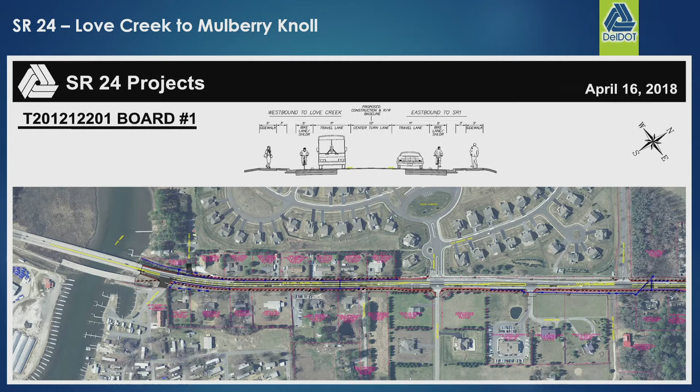I think I have these out of order, but I'll go from the far side. All 5 of these projects stemmed from the HSIP project years ago, and we're finally getting them closer to construction. This one shown here is the Phase 2 Love Creek to Mulberry Knoll. You can see the creek there.

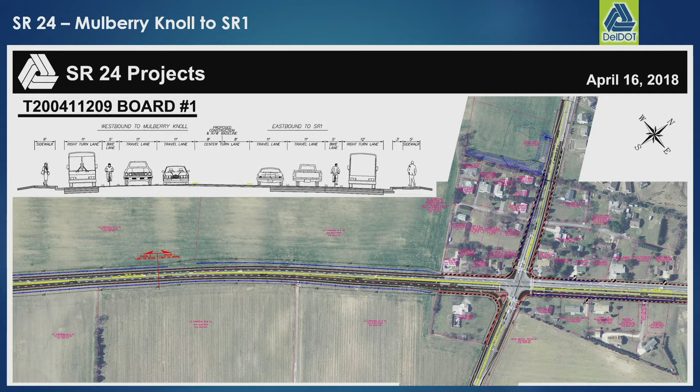And did I have them right? All right, how do I go back, Pam? The red button? Oh well, I'll just speak to it.

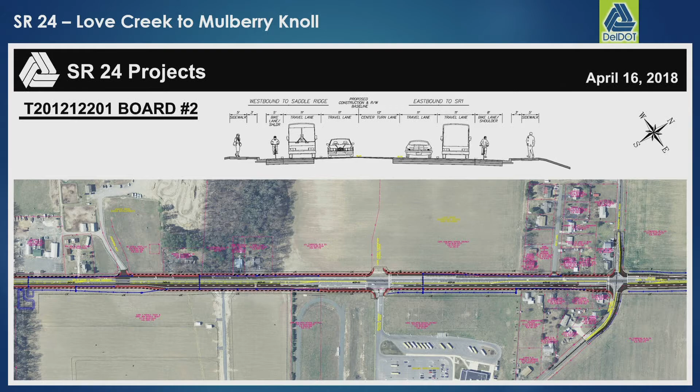So Phase 1 actually starts at SR1 and heads west towards Mulberry Knoll - that would be this terminus. This is pushing the 5-lane section that exists today further west through the intersection with Plantation and Warrington, then tying back to match existing. The second piece will then pick up that typical section, push it through the Mulberry Knoll intersection, west beyond the intersection with the schools, and then tie back to a 3-lane section from there to the Love Creek Bridge.

The first piece is currently in right-of-way acquisition. We're looking to PS&E this summer with construction to start in spring. It's an $8 million estimate.

The second piece, we have final right-of-way due in May of this year. We're looking at PS&E in fall of 20 with construction in spring of 21. This one has an estimate of $11 million. Ideally we're looking to have the contractor start on Phase 1 timed so it just flows right into Phase 2.

The other 3 projects are safety and operational improvements at 5 intersections to the west of Love Creek. The first at Camp Arrowhead and Angola Road has right-of-way due this month, PS&E in November of 20, construction in spring of 21, and an estimate of $4 million.

The next is at SR5 and 23. We currently have right-of-way in acquisition, PS&E summer of 20, construction spring of 21, with an estimate of $7.5 million. And the last one is at Mount Joy and Bay Farm Road.

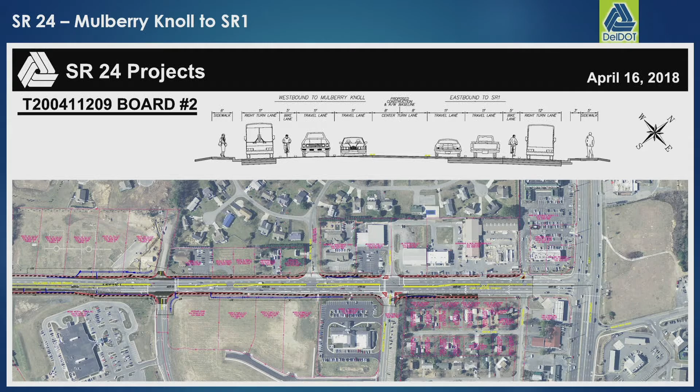All right, so that was a little bit about SR 24 and everything that's coming with that corridor. The next one we're going to look at is Plantation Road. The limits of this extend from US 9 near 5 Points all the way down to tie in with John's projects at SR 24.

Here is the concept for phase 1 of Plantation Road. The big takeaway is we're going to try to rebuild Plantation Road in a lot of this open space, where you see a 2-lane roundabout that we're proposing. The idea is to stretch that connector road that exists today between US 9 and SR 23, making it longer to get as much queuing as we can, and then the 2 lanes will take it from there to help flush out 5 Points at the busiest time.

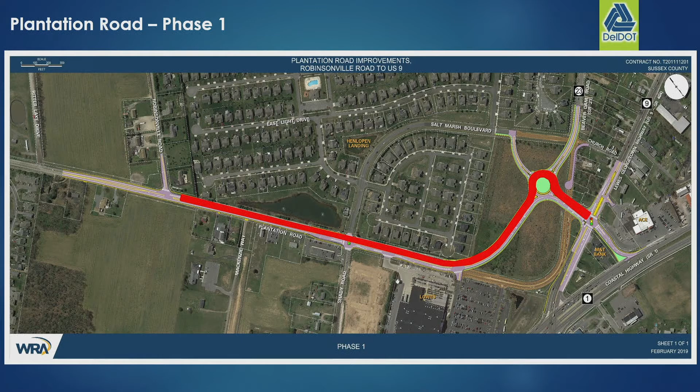So we're talking about that movement right there—that's the problem movement, and this project should go a long way towards helping with that. It's currently in design right now. We're moving towards semifinal plans later this year, hoping to hit final right-of-way in spring 2020, with a PS&E target of summer 2021. In addition to everything you see here, we'll be upgrading pedestrian and bicycle facilities throughout.

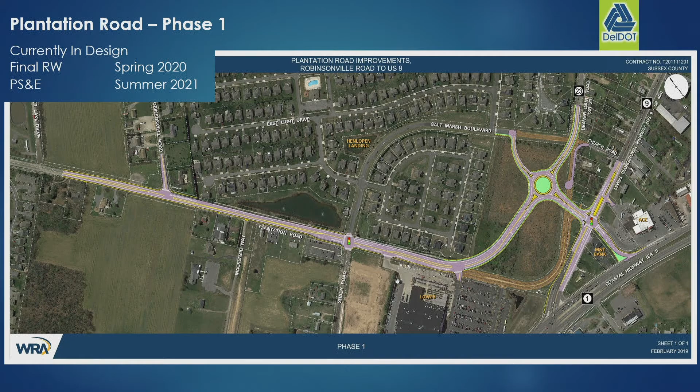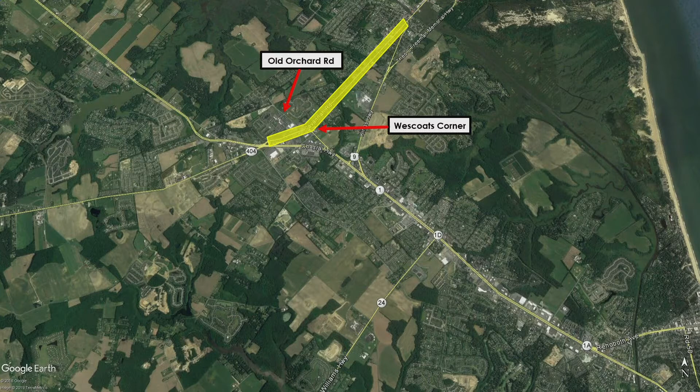At the signal we see a lot of rear end crashes, suggestive of congestion—not surprising given where we're talking about, since summertime traffic is very heavy through there. What's concerning are the angle crashes at the unsignalized intersections: the one at Marsh Road, and the one where Old Orchard Road comes in at Savannah.

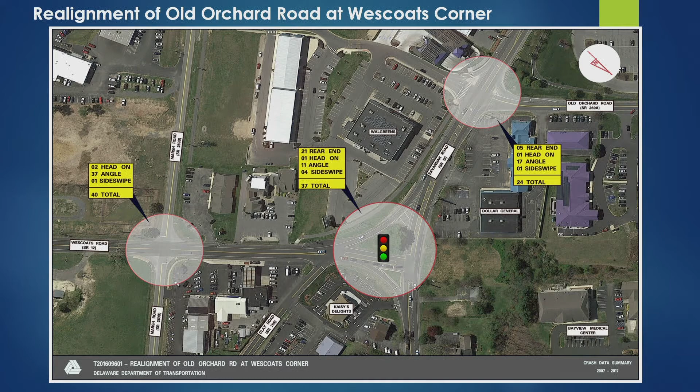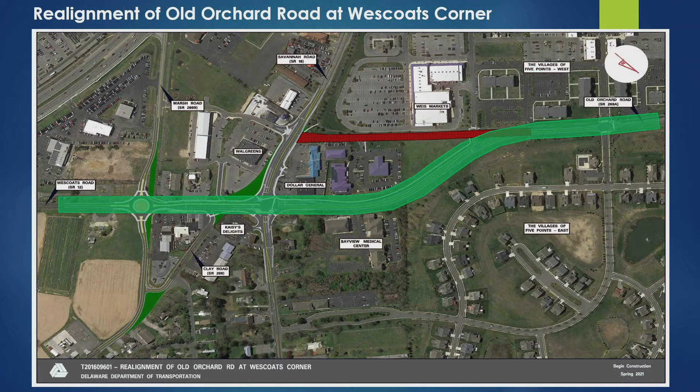So the fix is we're going to take that connection away—remove the intersection at Old Orchard Road to Savannah. We'll still leave the road there, but get rid of the intersection and provide a smooth route, realigning Old Orchard Road to tie in as basically a 4th leg at Savannah Road, an extension of Wescoats Road. We'll leave Old Orchard Road in place, just taking away the actual connection to Savannah, since there's still a lot of access and entrances/exits to businesses there today that we want to keep.

One of the other cool things about this project is we're going to build a roundabout at the intersection of Marsh Road and Wescoats—that's one of the spots where we saw a lot of angle crashes, so that should help solve that problem. Another hidden benefit of the roundabout is that it increases the storage length for the left turning movement at the intersection, at the signal with Savannah Road.

So if we went with a more traditional intersection, we'd end up striping in a left turn lane to go west on this screen to basically go down Marsh Road and connect over to Kings Highway, and that would have cut that distance in half. So we get that extra storage with the roundabout plus the safety benefits.

It's not shown on this screen either, but just to the right of this is the railroad corridor where the Lewes to Georgetown Rail Trail project is. We're looking at ways right now to try to provide a connection up to that, along with all the other bicycle and pedestrian connections we're making as part of this project.

So this one is currently in design. We're looking to hit final right-of-way plans in the spring of 2020, and PS&E about a year later in spring of 2021.

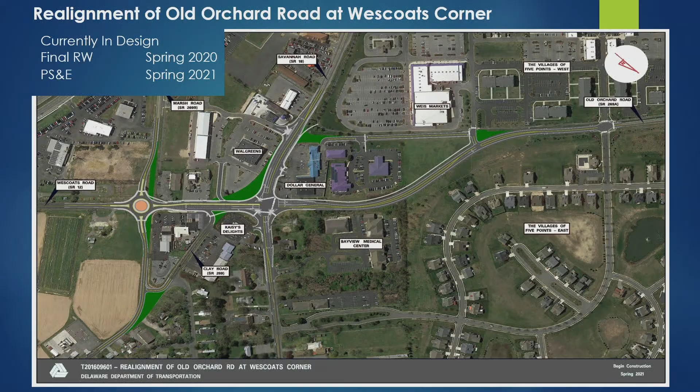The next one we're going to look at is the SR1 and Minos Conaway grade separated intersection project, right here in this area on SR1. This project has numerous safety and capacity benefits, not only to SR1, but also to the surrounding local road network. Everything you see on this screen here are all of the unsignalized intersections and median crossovers where we see crash problems continually, and this project is basically going to address all of them.

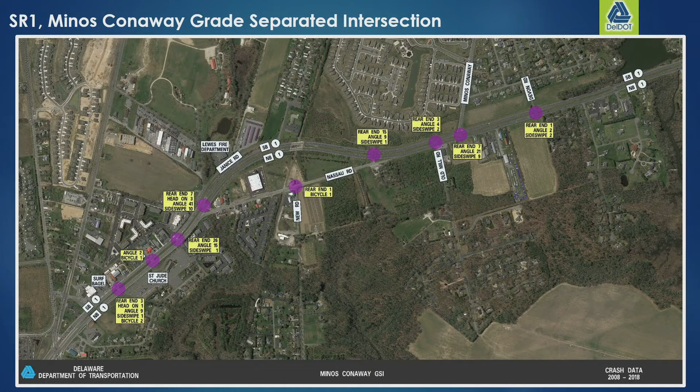So just take you through a little bit of history with this project. It's been identified early on years ago in the corridor capacity program back in the 90s and early 2000s, but it wasn't initiated until 2016.

But a few years before that, we were studying a recommendation to look at a connector road off of SR1 southbound to provide a one-way road under the Nassau bridges, basically to accommodate boat trailer traffic that was sticking out of the medians on SR1, trying to get over to New Road and back into Lewes.

So we were studying that for a while, and in 2015 we had this concept to show what the alignment would look like. But at that time it was found there were significant risks and expenses associated with all of the structural modifications that would have needed to happen to the Nassau bridges to fit a road, the railroad, and a multi-use path under the bridges.

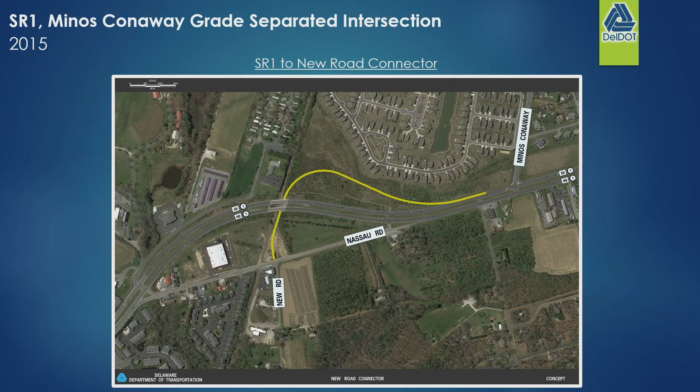That led us to 2016, where we started the Minos Conaway project. These are some of the early concepts associated with this project. They also had significant property impacts, total acquisitions, and actually some difficulty in trying to accommodate all of the traffic movements you would want with the grade separation project.

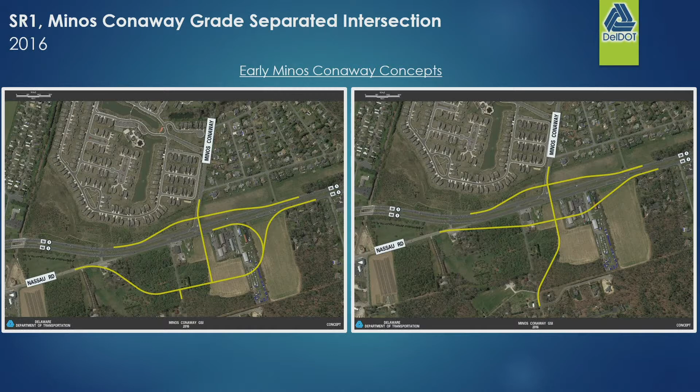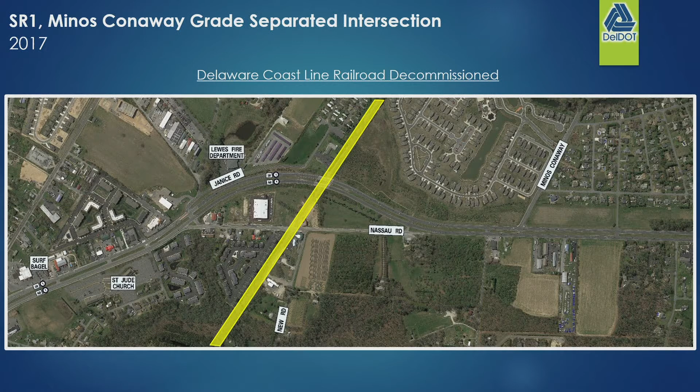But later in the year, it was the decision to decommission the Delaware Coast Line Railroad, which is shown here. That really opened up an entire new option for the project team and led us to the concept that we are now taking forward into design, which is shown here.

So let me just take you through what this general concept is. We are basically using that railroad corridor that was decommissioned, and we're going to put a road there. That's where the Lewes to Georgetown Rail to Trail project is today. It's recently been paved, and people are using it, even though it's not totally done. But we'll be accommodating that with this as well.

So the idea is to put a road there and then connect it on either side of SR1 with service roads and ramps. We're basically retrofitting an interchange in at this location, and we're going to do that by shifting the SR1 baseline. North of the bridge, we'll be shifting it slightly to the west, shrinking down the median to do that, and we'll be building a new road to the west for southbound traffic. Then we'll actually be using the northbound lanes of SR1 today; they'll become the service road once we're done with the project.

We've selected roundabouts as the preferred intersection control type. That provides some added benefit as well under the bridge, because we don't need to fit in turn lanes, so there's some width we get to save on there, as well as the inherent safety benefits of roundabouts in the area.

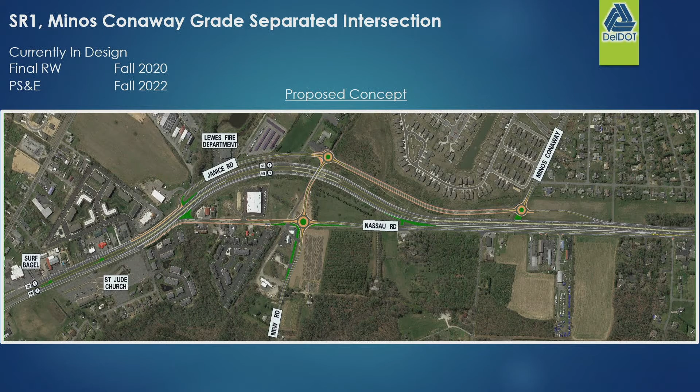So just want to take you through some of the renderings that we did for some of our workshops last year. It doesn't show the roundabout here. At this time, when we had these done, we were not sure whether we were going to go with roundabouts or three-way stops or signals or whatever they may be.

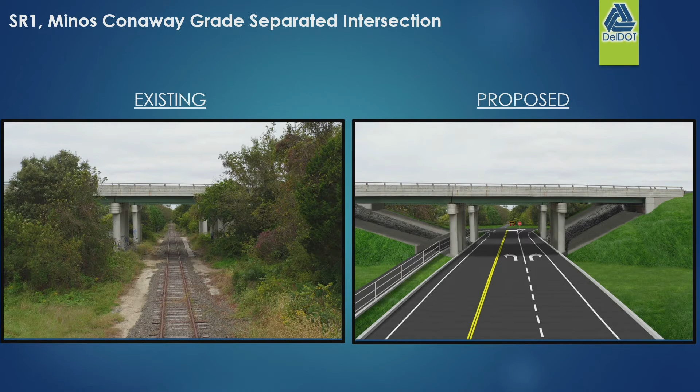But it gives you an idea about what a road and a multi-use path may look like under that corridor. This is an overhead view looking at SR1, looking to the south, and you can kind of see where the northbound lanes tie in there on the left. That's where the service road is going to be. So you can see how much shifting we're doing and where we're building the new road to the west, the service road. The good news is we own a lot of that right-of-way already.

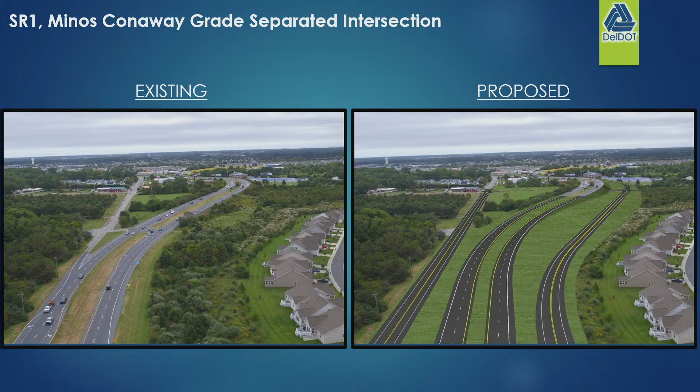And this is the concept we're moving forward with. This is just a blow up of the roundabouts that we're considering at each intersection control, the new intersections that we're building. And I think that's the last slide for this.

So the overall schedule for this, it's in design right now. It's an in-house design, which is something we're proud of. Nick Rigolino in Project Development South, who doesn't get enough credit, is the lead designer on this project, doing a fantastic job for us. And we hope to hit final right-of-way plans in the fall of 2020, and then PS&E 2 years after that in the fall of 2022. So we expect construction to begin on this in the spring of 23.

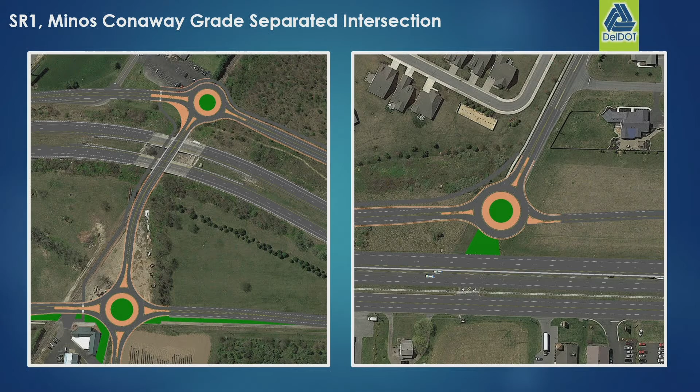So that is it, I think. Yeah, that's it. So it's fun to be working on these kind of projects for us. And any questions?

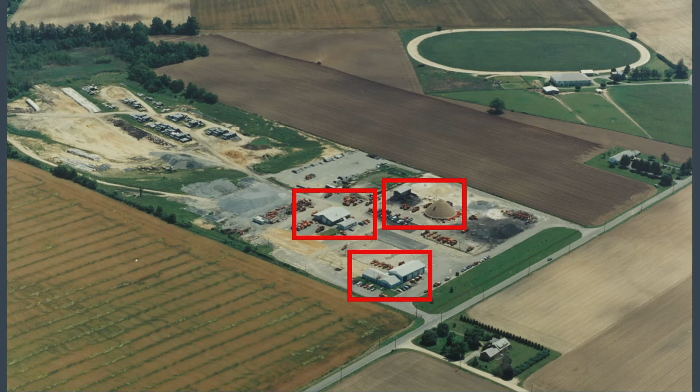This is what it looks like today. We have two 3,000 square foot offices, a 6-bay maintenance shop that's 10,000 square feet, 5,000 ton salt barn, and thousands of square feet of covered storage.

Our mission at facilities is to maintain our assets in a state of good repair while also improving energy efficiency, bringing all of our yards up to that standard you guys just saw.

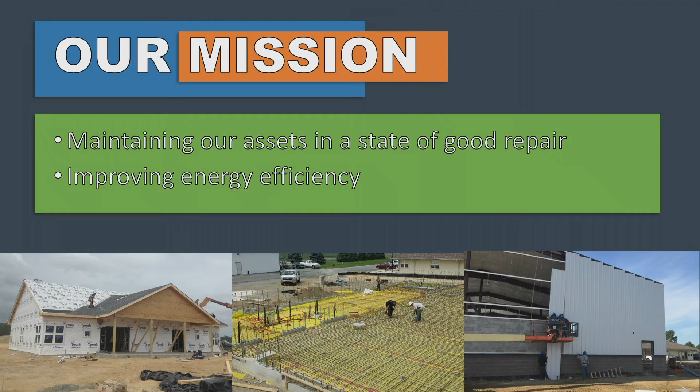5 years ago, we did a building assessment. Turned out a little bit over 50% of our buildings were considered in a state of good repair. 5 years later, we're doing a great job, we're almost up to 75%.

But it's fun. This is Bridgeville Maintenance Yard. It was constructed, this is a completely new maintenance yard built in the middle of a farm field. This was replacing our Seaford Maintenance Yard, which was becoming dated, undersized, wasn't serving us anymore.

I want to point out the blue building in the front, that's our crew quarters. This building is vital to any of our storm response operations. These guys spend days on the road responding to storm events, and so they need a reliable office that they can come back to, get some rest, get cleaned up, and get back on the road and keep working.

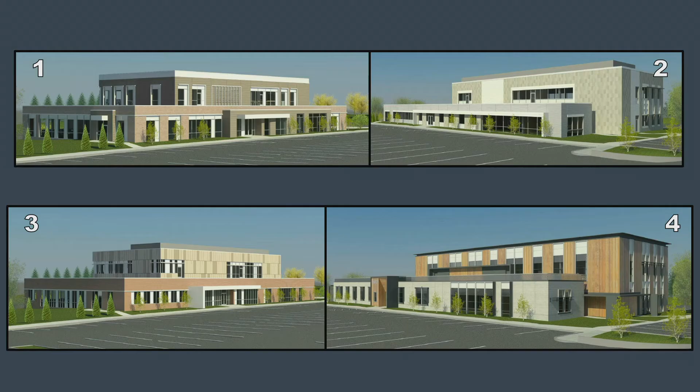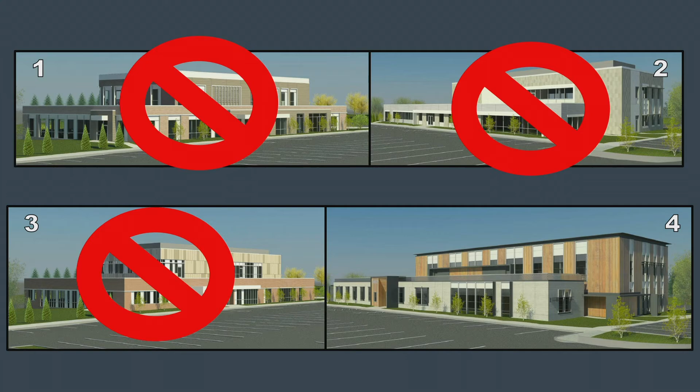So our design team brought photos of other government buildings locally, nationwide. We kind of picked some different elements. They developed these 4 concepts for us, and being a democracy, we thought it was very important to get our tenants to vote on it. So we went through and we posted this up. People voted, and option 4 won hands down for us.

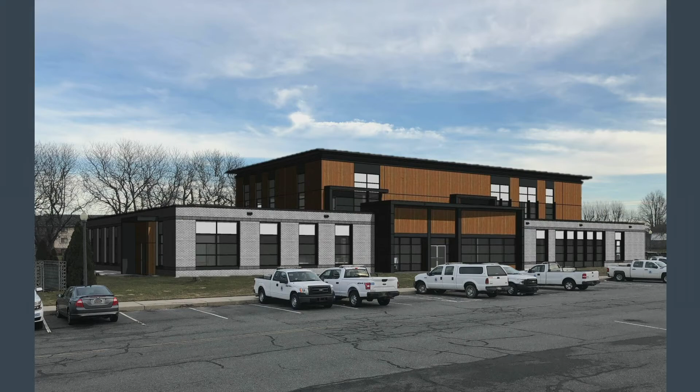And this is what we're hoping it will look like in a few years. This is the reverse angle from Route 7. This is a Google Maps shot. So this is what our new building could look like. And we're very excited about this project, and we want you guys to get excited about it too.

We were thinking about different ways to do this, and a Lego model would be cool, but that would be really expensive and take my guys forever to put together. So we want to encourage you guys to open up your phones and open up this Augment app we were talking about earlier. We pass out coasters during lunch.

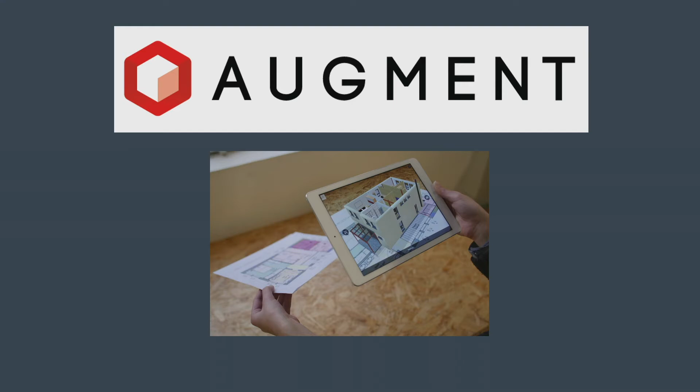Those might have been for your sodas, but now if you could move your soda and pick up your coaster, we're going to go through a couple of screens. The first time you use it, there's a couple of screens.

It's going to ask you to say start scanning, and it's going to scan the image. Make sure you can see the coaster there. It might ask you permission to use your phone or the camera. Then it's going to ask you some questions, like are you standing? You can say I'm standing, and you can say skip tutorial. It's going to give you another screen, skip tutorial, sorry.

And then this is what you should be seeing. So now everyone can take home a 3D model of the new Bear Administration Building and put it in their pocket through augmented reality. Quick shout out to Travis Plystack, our intern, who built this model in about 6 hours in Google SketchUp. And it's my brother Logan who introduced this technology to me.

But the question is, this is a cool party trick, right? Well, what can we do with it as a department? We can take this out in the field. We can construct a 3D model of a sign structure, get our iPad, bring the model into the view, and see exactly what that sign structure is going to look like standing on the side of the road.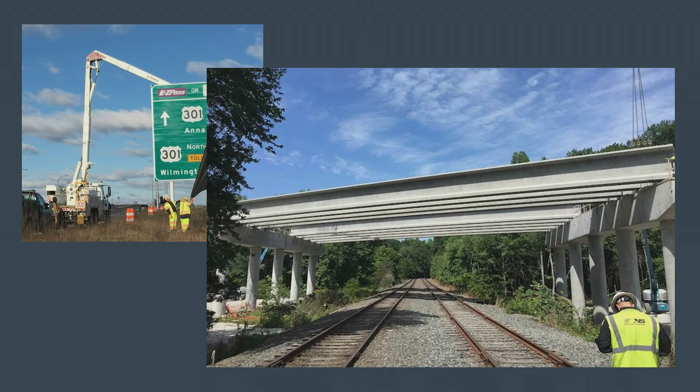But I think this is really where we're going to get our bang for the buck. We can integrate this into our plan sets and take a 2D model and allow a superintendent or foreman out in the field to scan a 2D detail and get a 3D model that he can articulate and turn, getting a better understanding of what this is so he can build it right the first time and build it to our expectations.

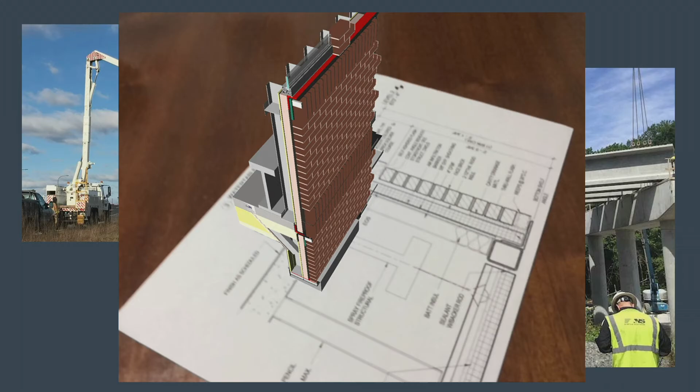And so I want to challenge you guys to see what you can do with augmented reality. And I challenge you to make DelDOT the center of the universe. Thank you.

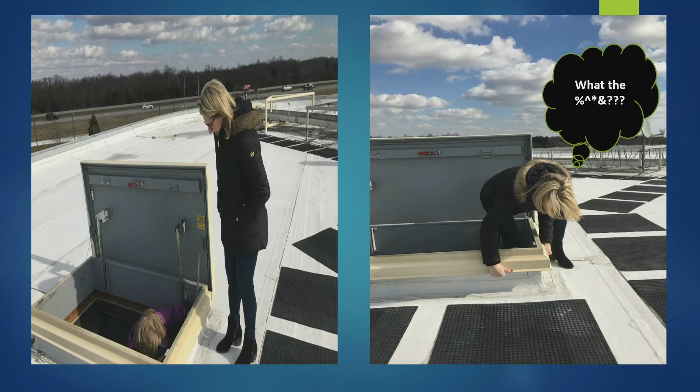Current capital projects at the TMC: we're performing a roof replacement, which we hope to have started this summer. We've just awarded a generator redundancy project, which will link the TMC and DEMA generators so we have redundancy if there's ever an issue. There's also a UPS replacement project going on, as well as floor plan upgrades.

DMV and toll locations: we've just completed a project at the Dover DMV, which was exterior work providing better accessibility, replacing sidewalks and parking lots, and installing new storefronts and new doors. We're getting ready to go to construction on the Dover DMV lanes, which is a window replacement. We're currently designing a project at Dover DMV to perform ADA accessibility work to the bathrooms and other areas.

We're currently finalizing a project at the Wilmington DMV for sidewalk, parking, and entrance repairs. And we've just completed a project at the Georgetown DMV for workstation reconfigurations.

At Danner campus, we've just completed a lower level ADA compliant new Bat Cave. The individuals previously located in what was known as the old Bat Cave are now relocated into the basement of the administration building.

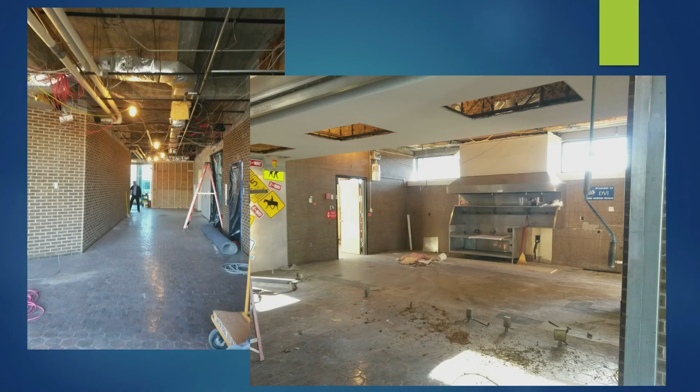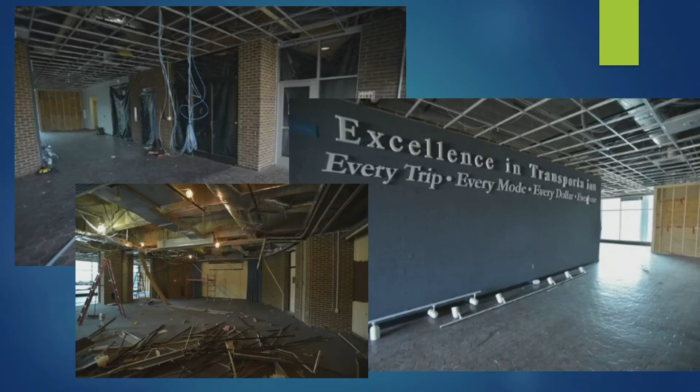Here are some pictures as we started construction. You'll see the kitchen being taken out, and we'll show you what it will be replaced with. Here are existing conditions - not many people had access to the Bat Cave, so this is kind of what it looked like before the contractors got in there.

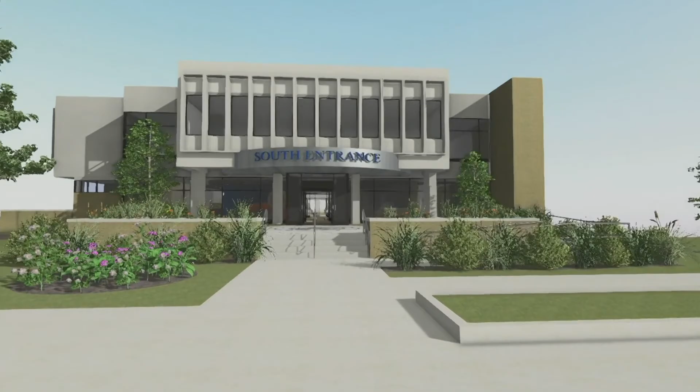And we're going to play a video for you. This is the concept and what the renovation project will look like.

You'll see we're moving the ADA ramp from the left side to the right side. It's a full replacement of the area out front.

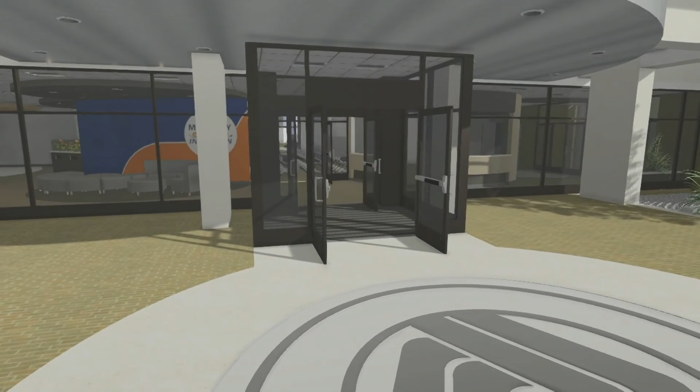You guys are the first to see this, so this is exciting. You'll see new front doors, new vestibule, all with proper clearances.

New reception desk off to your right. So we'll be maintaining two reception areas, both a south entrance and a north entrance for the Danner campus. We're repurposing what was the Bat Cave.

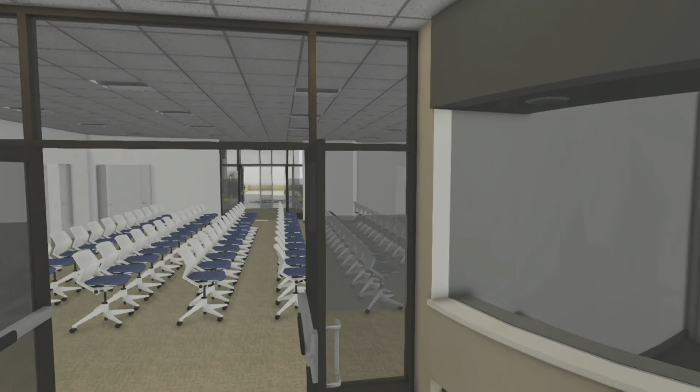This new conference room, theater style, will hold approximately 80 people. We'll also have tables available so that if you wanted to conduct a training, approximately 50 people for a comfortable training. We've planned for being able to tuck the tables and chairs away if you want to have a public informational session.

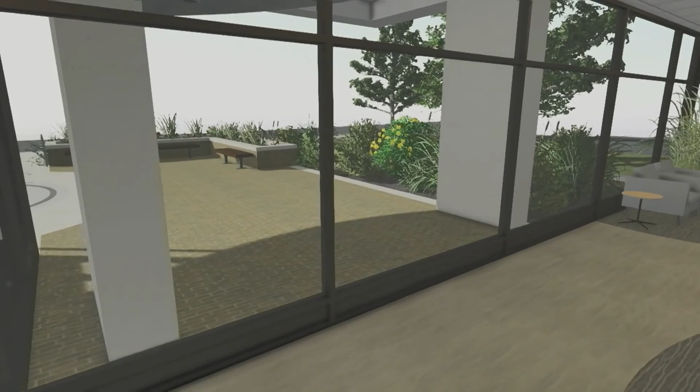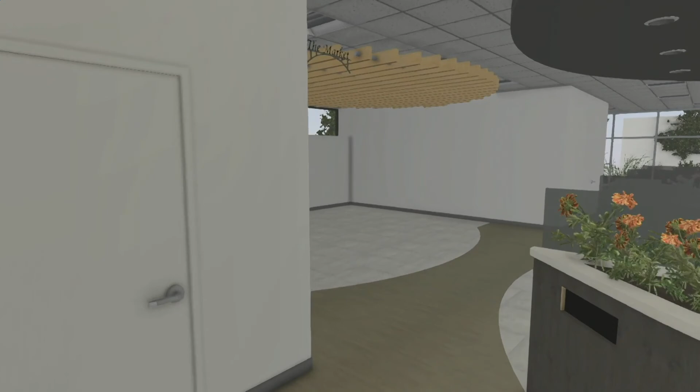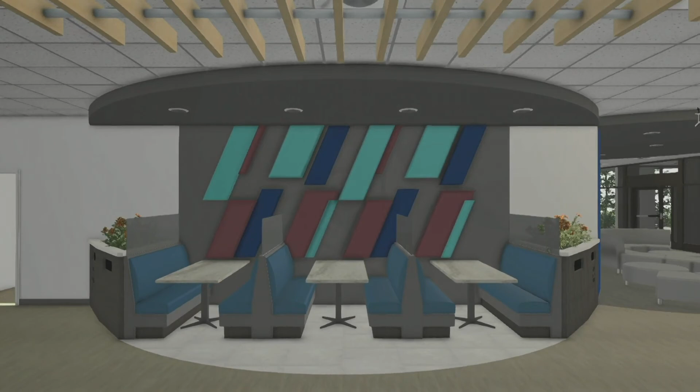So then we'll take you through, we'll have a couple different seating areas. As visitors come into our facility, there'll be comfortable locations for them to wait. You're entering now what we refer to as the market. In this walkthrough, it's empty, but I'll give you some images when we're done as to what it'll look like. We're providing enough seating so that staff members can take their laptop down there if they want to work or hold a meeting.

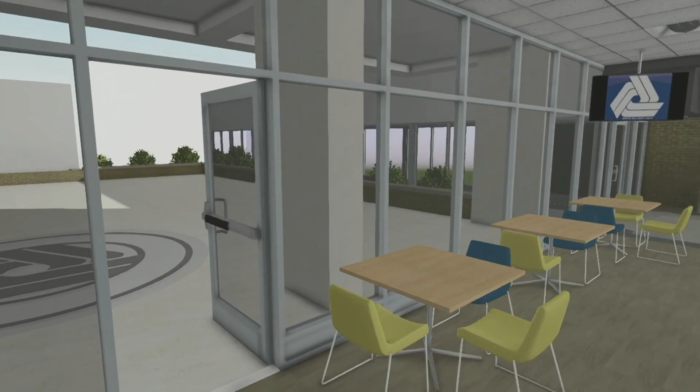And then this is the rear courtyard, which if you've been to or work at the Danner campus building, you'll see it's in the process of tearing everything out.